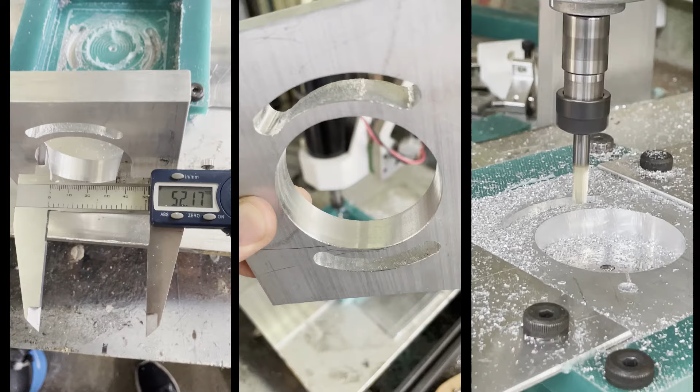My CNC DIY router machine is officially tackling the aluminum material. The outcome is so far not perfect. I cannot complain about the finished surface, but the time required for obtaining these results is not efficient in order to make products from this machine.

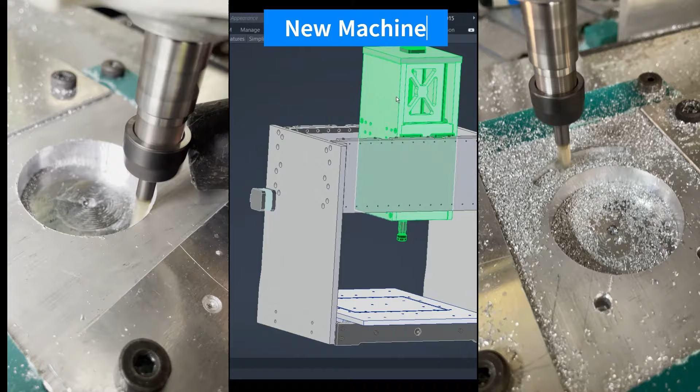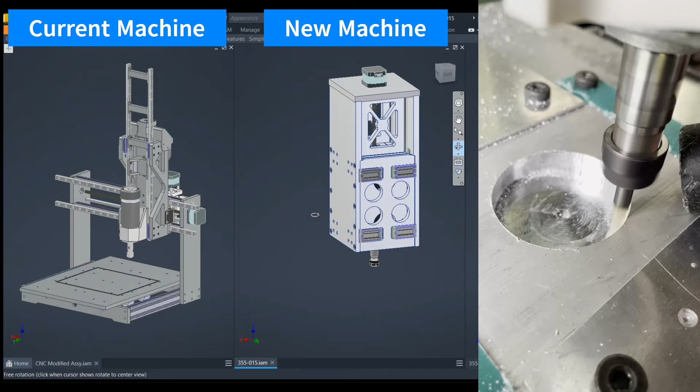My initial plan was to try to machine as many parts as possible of the new large design. But after machining this part, I will definitely take a step back and machine a less ambitious project, especially considering that most of the parts cannot be machined on the current machine that I have. I will have to pay a machine shop a ton of money for doing these parts.

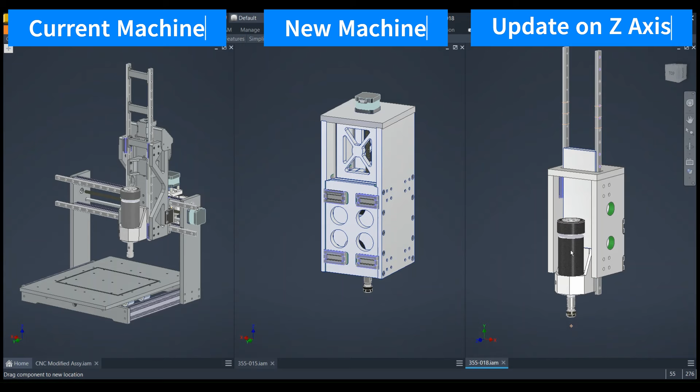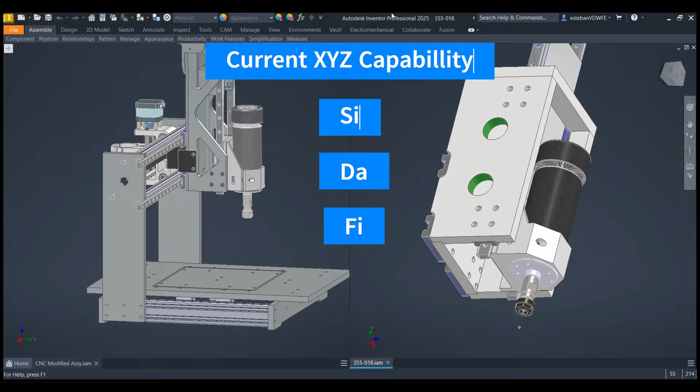I prepared this new design that is just an update instead of a full machine design. Always trying to improve the current machine, I will replace the main 3D printed part of the Z-axis with one made out of aluminum plates. The design takes into consideration current machine travels, a single setup for critical surfaces, datum features, and fixtures and clamps. The current machine travels are X 240 and Y 160.

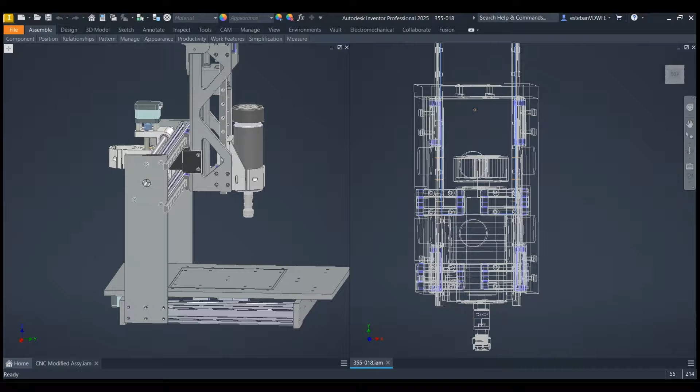So that means that I can easily machine parts of 200 millimeters by 100. And well, the thickness is not a problem, you know. I'm using my Z-axis design that has a lot of travel, something around 95. The thickness of the plates that I'm going to use is just 12 millimeters.

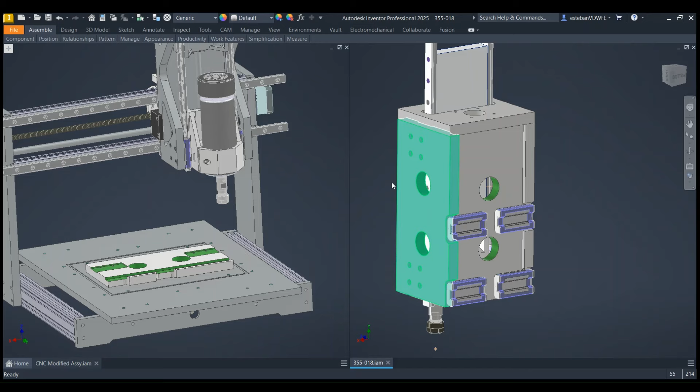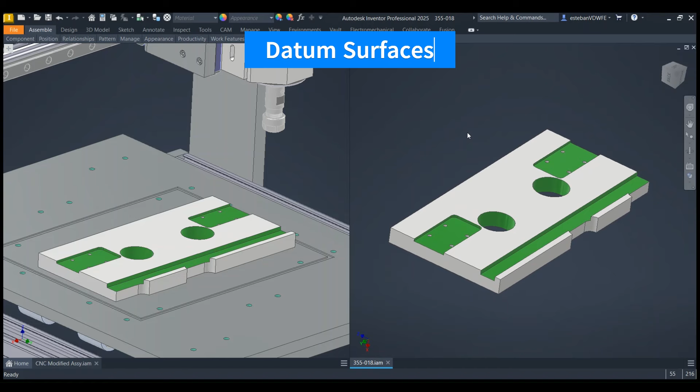A single setup for the critical surfaces is going to minimize the necessity of machining the entire faces of the part. The fixture should not apply bending forces on the features in order to let them be stable after machining. What I mean is that all the faces that should be even and that define a feature for the linear guide rails or the carriages are going to be machined in a single operation. So everything is going to have the same origin. And all this has a direct relation with the datum surfaces for alignment and straightness of the linear guide rails.

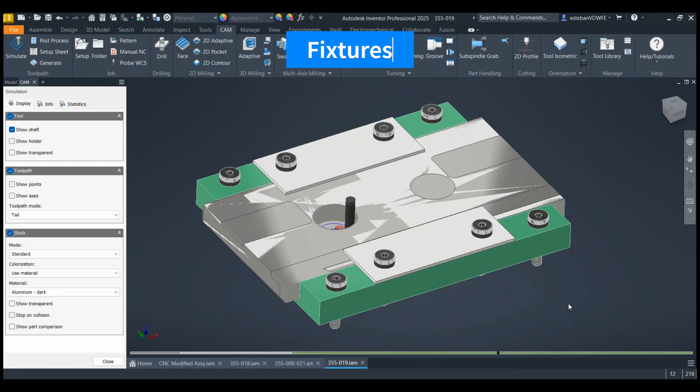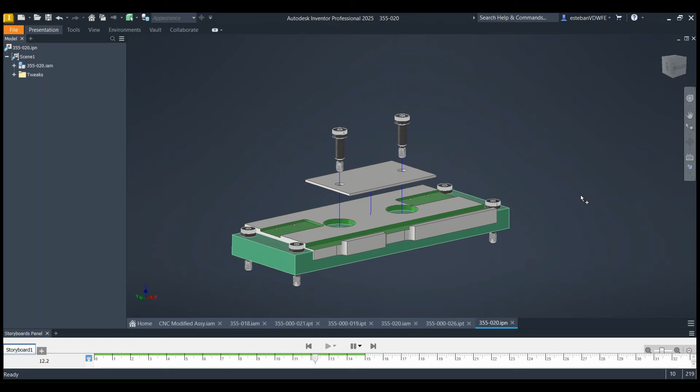Talking about fixtures, these two holes on the larger parts are going to be my method for clamping. The first fixture is going to hold the part while I create the two central holes and finish the part to the total length of 200 millimeters. I will have a second fixture with two protrusions, same dimensions as the two holes, so they are going to be a negative, let's say. I'm going to clamp down using the protrusions as the features that provide location, and two plates at the top that push down the parts. Those are located at the center, so they leave an open space for machining the other features.

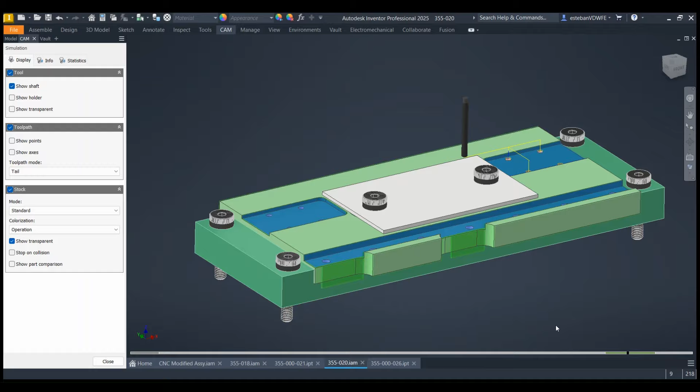My method for the fixtures is not usual, but it consists of machined fixtures made out of high density plastic. I have the theory that these fixtures have the capacity of absorbing or damping some of the vibration. I should do more testing on this aspect, but as you can see, I have been using this type of fixture for the current part that I have successfully machined.

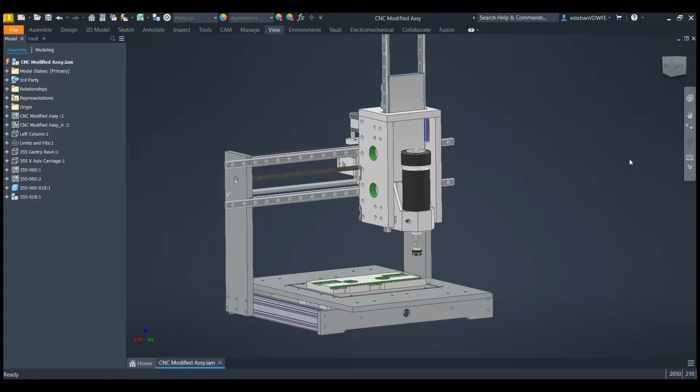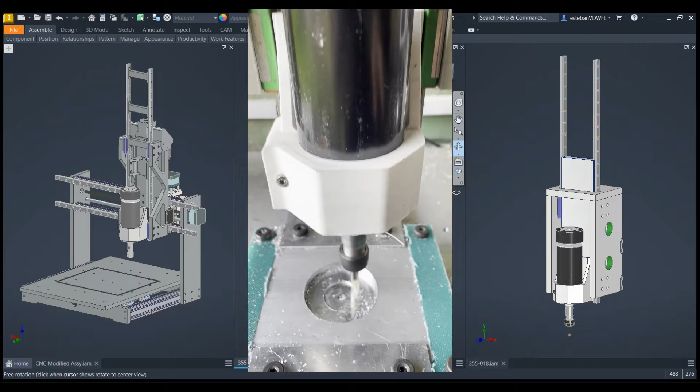I have no doubt that this is going to be a good improvement. If the current machine with a huge 3D printed part that is cracked all over the place is capable of making this, the new aluminum piece is going to work perfectly.